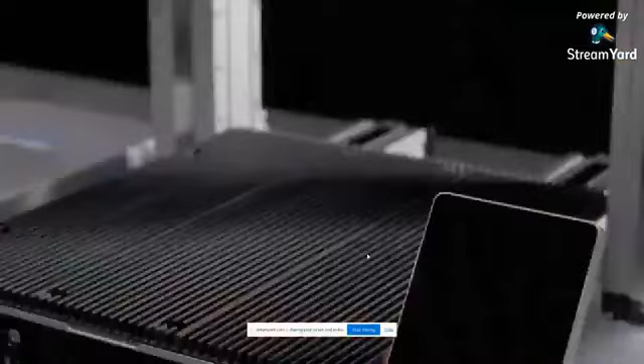When the first Snapmaker was introduced, it raised over $2 million and connected over 10,000 users in an active community. With the new Snapmaker, we're bringing the next generation of advanced technology to this iconic design. The new Snapmaker is faster, smarter, larger, and more powerful than ever before. From 3D printing to laser engraving and cutting and CNC carving, it supports a wide variety of materials for limitless creativity.

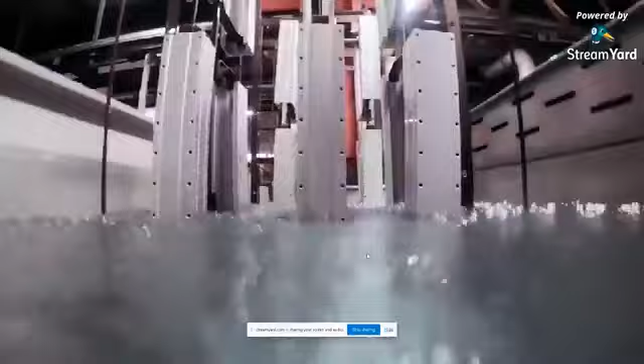The components are made from high-strength metal. Anodizing converts the surface of the metal into a durable anodic oxide finish. Each process is strictly controlled, and due to the higher level of automation, both the quality and the speed of production have been significantly increased. Every part is meticulously made.

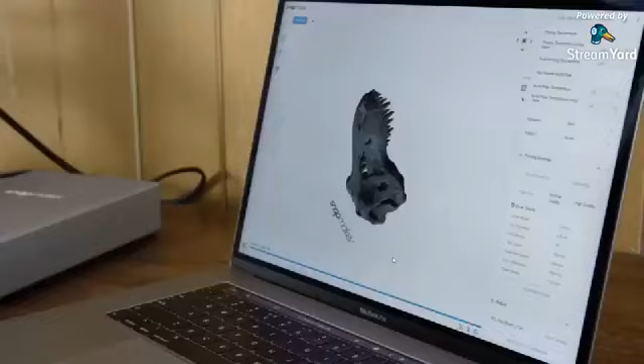In creating the new Snapmaker, we've taken the all-metal design to the next level. The new Snapmaker is modular, and it only takes a few steps to set up. Our software has greatly simplified the process of 3D printing, laser engraving, and CNC carving. You can also connect and control your Snapmaker via Wi-Fi or with the smart touchscreen.

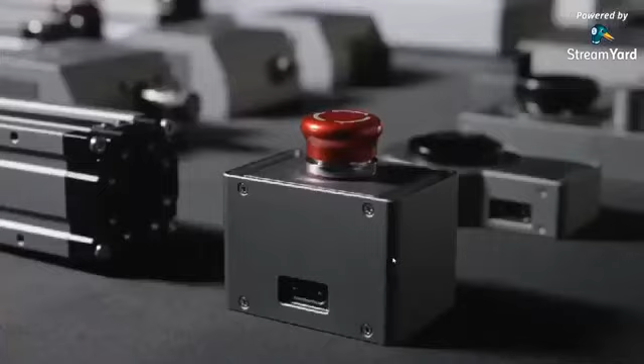Snapmaker is more than just a series of machines. It's a system of powerful modules and add-ons for creative people like you. You can make an extra-large CNC router, a huge laser engraver, and even a 4-axis CNC machine. You can further enhance it by adding an IP camera, a hand wheel, an emergency stop button, an enclosure, and more. The new Snapmaker includes an automatic bed leveling feature that ensures you print on a level bed every time.

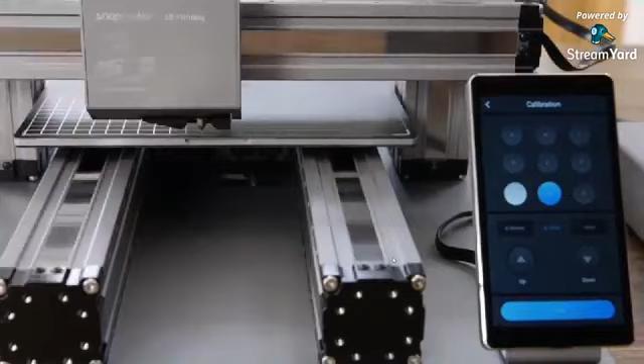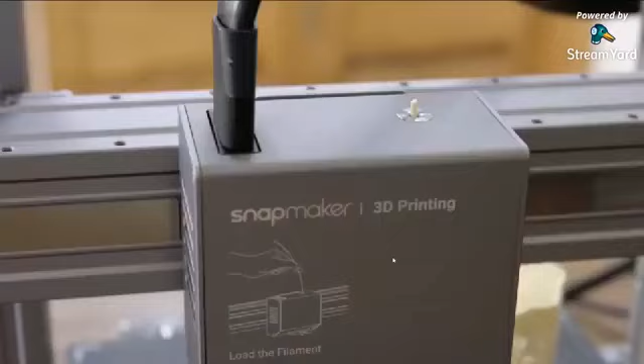The cooling system is redesigned to cool the print in the most efficient way possible. If the filament runs out, Snapmaker will pause and notify you to load new filament. It can also detect power loss and resumes exactly where it left off, so you can recover any project. To remove a print, simply lift the build plate and flex it.

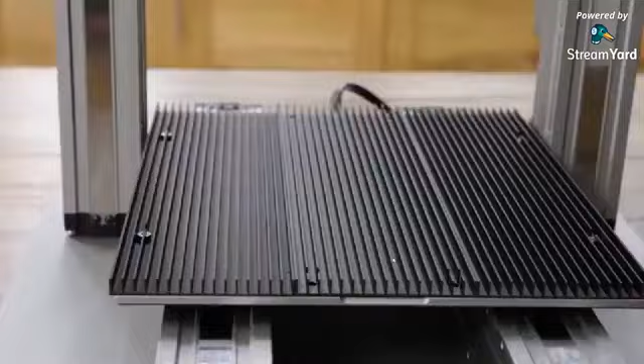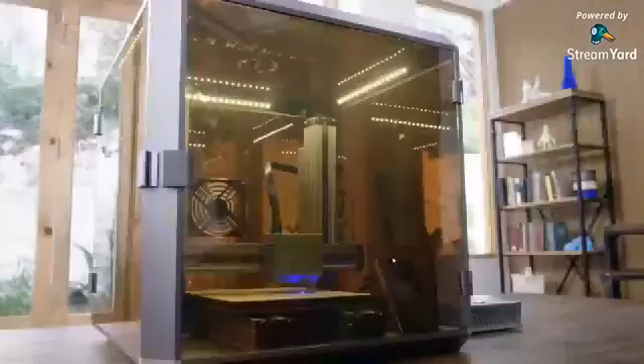For laser cutting, it uses a specially designed aluminum grid table. Its built-in camera allows you to preview a design on any material or surface. What you see is what you get. It makes laser cutting as easy as drawing with a pen. It can convert your drawing into a vector image that can be edited directly in the software for laser engraving and cutting.

It is 5 times faster than the original model. Whenever a new idea strikes, you'll be ready to turn it into reality.

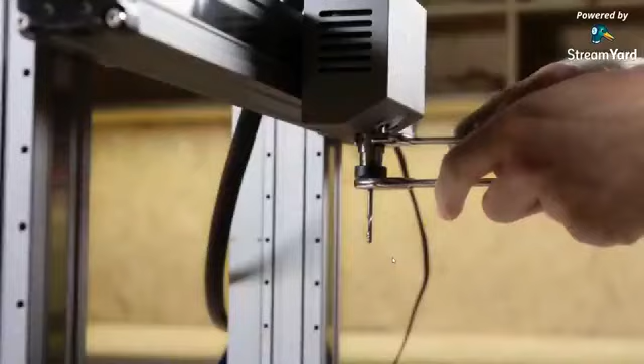For CNC carving, it now features a fully upgraded CNC module and wasteboard. It supports over 100 carving and cutting bits by using the standard ER11 collet. Upgraded clamps provide a tighter hold. It has faster working speed, a larger step down, and fully enclosed linear modules.

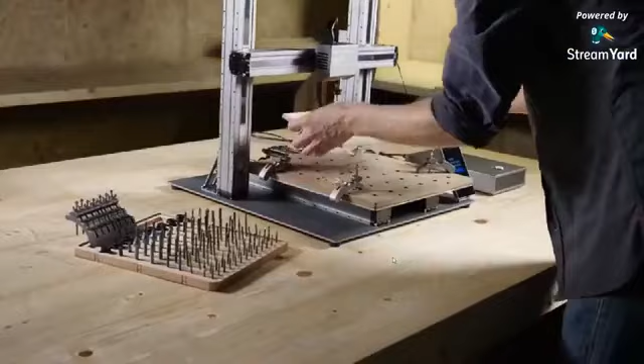Bring your ideas to life and unlock your full creative potential with the new Snapmaker. It is the most advanced 3-in-1 3D printer we've ever created.

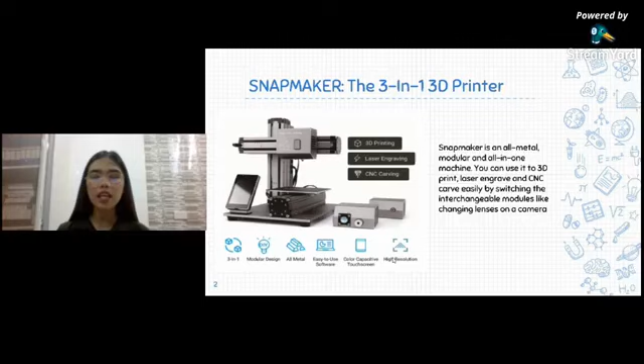Snapmaker, the 3-in-1 3D printer, is an all-metal modular and all-in-one machine. You can use it to 3D print, laser engrave, and CNC carve easily by switching the interchangeable modules, like changing lenses on your camera. The three interchangeable function modules are the 3D printing module, the laser engraving module, and the CNC or computer numerical control carving module.

Now for the 3D printing module, it is an additive manufacturing process that creates a three-dimensional object by incrementally adding materials until the object is complete.

There are several types of 3D printing technologies in use today, and FDM, or fused deposition modeling, sometimes called fused filament fabrication or FFF, is the most popular one. FDM is a type of additive manufacturing technology that enables the construction of three-dimensional objects, prototypes, and products through a computer-aided manufacturing process. It is used in 3D printing or the design of solid models and prototypes in a layered or additive approach.

For the laser engraving module, in 3D printing it is an additive process. Laser engraving and CNC are types of subtractive manufacturing methods. The laser engraving module uses a laser beam to create a detailed design on the surface of an object. The CNC, or computer numerical control carving module, is a subtractive manufacturing technology where parts are created by removing materials from a solid material using a variety of carving or cutting tools. This is a fundamentally different way of manufacturing compared to additive, which is 3D printing technology.

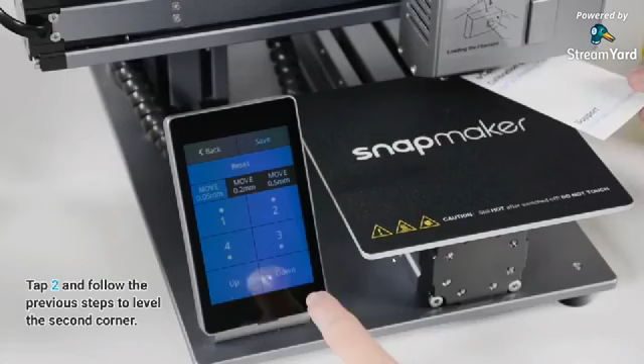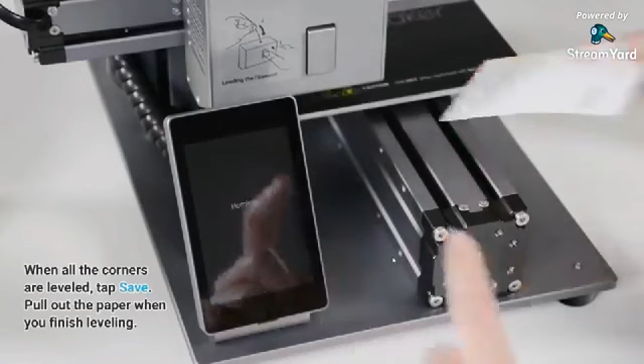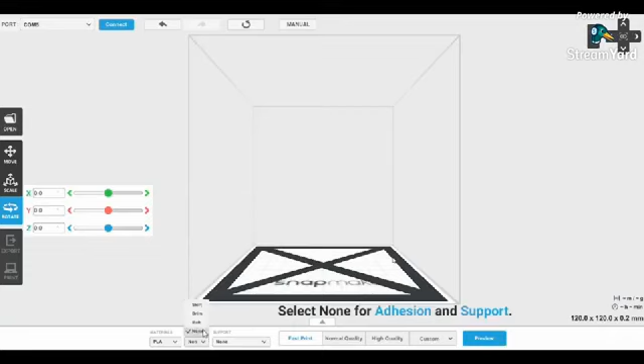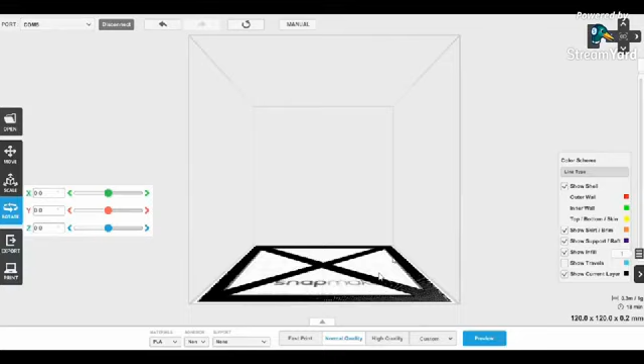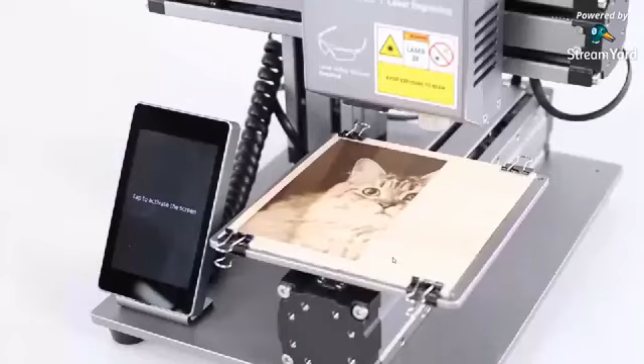In this video, we're going to demonstrate the use of the Snapmaker Original Laser function by engraving a grayscale image. It will cover the whole process of laser engraver usage, including generating G-code, fixing the material, determining the engraving area, transferring G-code to the machine, and starting engraving.

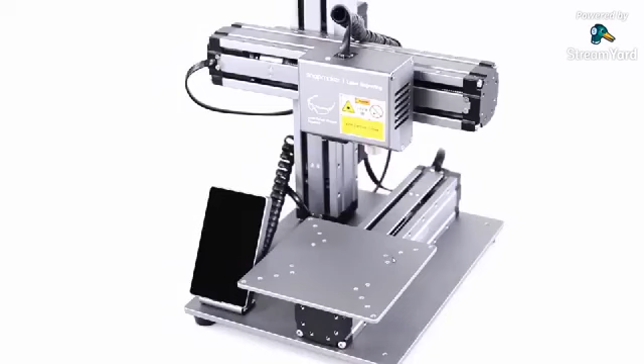First, you need to download the software from our website and install it. Then make sure both the laser module and the engraving platform are properly assembled, and all the cables are correctly connected. Please prepare the items and tools as illustrated. Every time before you turn on the laser, make sure you and any viewers have put on your laser safety goggles.

Open the software, and select your machine model first. Next, enter the Laser G-code generator. You can upload multiple files from different modes and engrave them in just one G-code. In this case, we select grayscale mode to upload a grayscale image as an example.

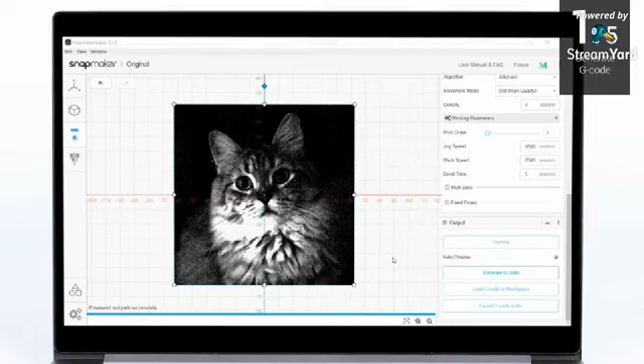Left-click to select an image. Right-click to see the operation menu. You can configure the settings for the image as needed. Auto preview is enabled by default, and the software will automatically generate the image preview based on the current parameters. If auto preview is disabled, you need to manually click preview. After you have set the laser power and finished configuring the other parameters as needed, click Generate G-code.

You can use a pencil to mark the midpoint of the material, which is applicable to setting the work origin later. Place the material, then fix it to the engraving platform. Make sure the clips will not collide with any parts of the machine.

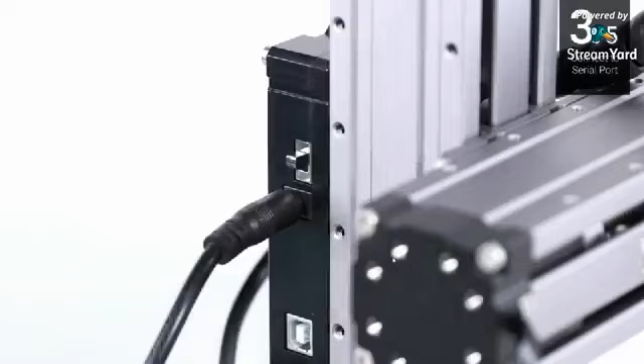Turn on the machine. Connect your computer to the machine using the provided USB cable. Then enter Workspace and refresh the serial port list in the Connection section. Click the drop-down button and select the serial port of the machine, then click Open.

Enter the Laser G-code generator, then click Load G-code to Workspace. Before you turn on the laser, make sure you and any viewers have put on your laser safety goggles. Now set a small value, such as 5%, for laser power, then turn on the laser.

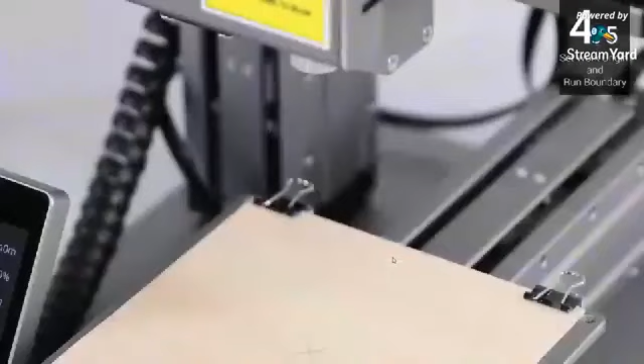Find out where the engraving will be by setting the work origin. The work origin corresponds to the 0,0 coordinate origin in the software. In this case, the center of the grayscale image corresponds to the coordinate origin in the software, so we move the laser spot over the center of the material.

Place the calibration card under the laser spot. Keep adjusting the height of the laser module until the laser spot is smaller than the black dot on the calibration card.

Click Set Work Origin. Click Run Boundary to check if the work origin is proper. If not, reset the work origin and run boundary again.

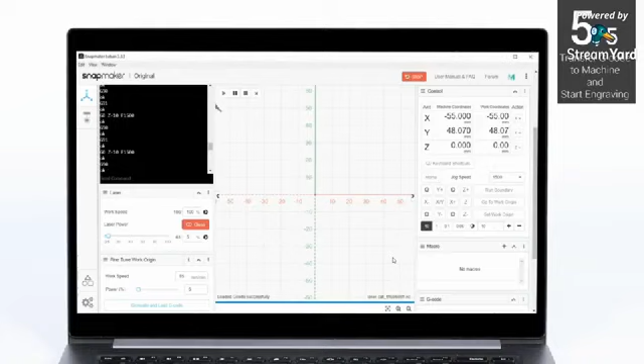Now you can use the USB cable or the USB flash drive to transfer the G-code to the machine and start engraving. If you prefer online engraving, just click the Run button in the software. In this way, the computer must be connected to the machine throughout the process. You can adjust work speed and laser power during the engraving process.

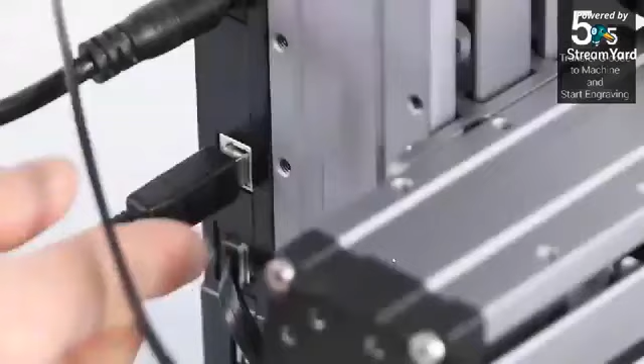If you prefer offline engraving, please disconnect the serial port and unplug the USB cable. Enter Laser G-code generator, then click Export G-code to file. The extension of the exported G-code file is .nc by default.

Save it to the USB flash drive. Insert the USB flash drive into the controller of the machine. Tap Files on the touchscreen. Select the G-code file and tap Start to start engraving.

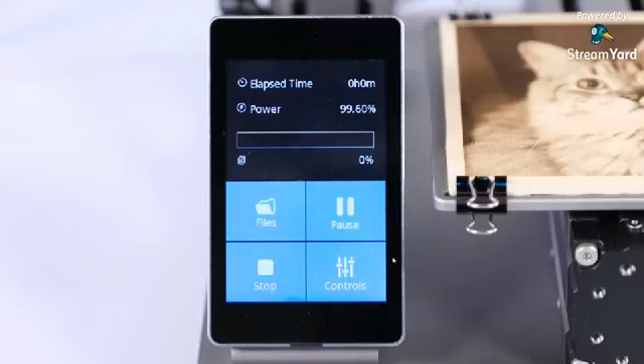When you're done, tap Controls, then Jog Mode on the touchscreen. Move the laser module and the engraving platform to a proper position. Then remove the clips and the finished work.

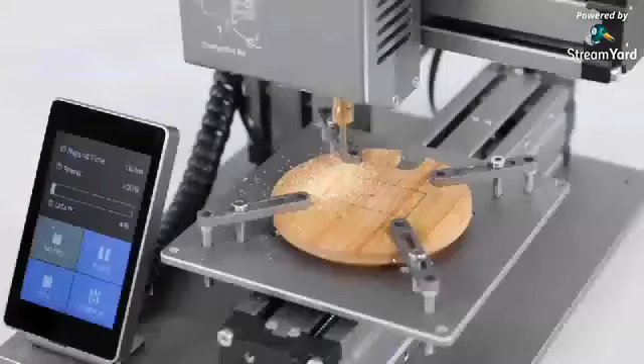In this video, we're going to demonstrate the use of the Snapmaker Original CNC function by carving a personalized lid. It will cover the whole process of CNC carver usage, including generating G-code, fixing material,

attaching the CNC bit, determining the carving area, transferring G-code to the machine, and starting carving.

First, you need to download the software from our website and install it. Then make sure both the CNC module and the carving platform are properly assembled, and all the cables are correctly connected. Please prepare the items and tools as illustrated.

Open the software, and you need to select your machine model first. Next, enter CNC G-code generator.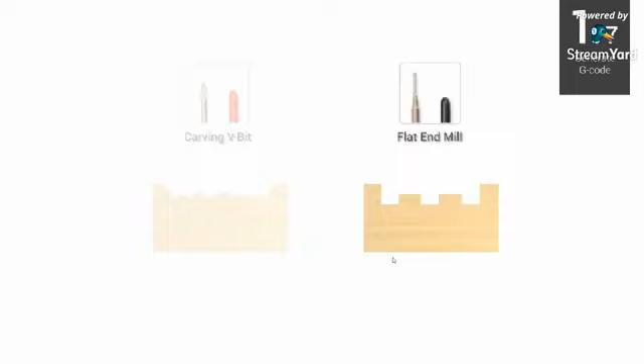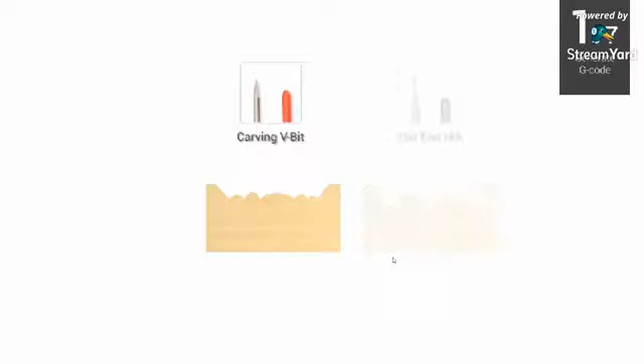Flat end mills are typically used for slotting or cutting materials into a flat surface. Carving V-bits are great for carving detailed designs, especially in relief and curved materials. In this case, we will use an image for carving, and we select the carving V-bit.

Select relief mode to upload the image. You can upload multiple files from different modes and carve them in just one G-code.

When setting the size of the carved image, make sure it is smaller than the sizes of both the material and the carving platform. Based on the measured material thickness, set the target depth as needed. And based on the material properties, set the step down as needed.

Auto preview is enabled by default. The software will automatically generate the image preview based on the current parameters. If auto preview is disabled, you need to manually click Preview. After you have finished configuring the other parameters as needed, click Generate G-code.

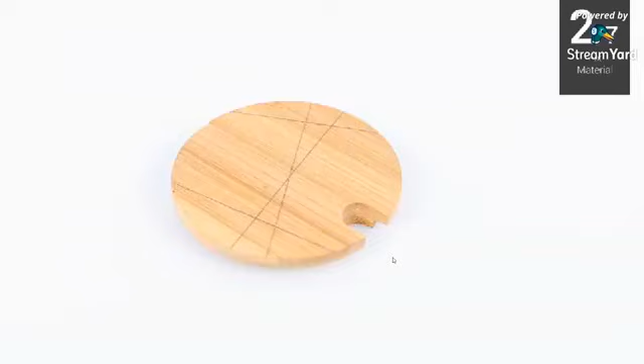You can use a pencil to mark the midpoint of the material, which is applicable to setting the work origin later. Also, according to the size previously set in the G-code, you can mark the estimated carving area of the material.

Place the material, then attach the fixtures outside the marked carving area. Make sure the fixtures will not collide with any parts of the machine.

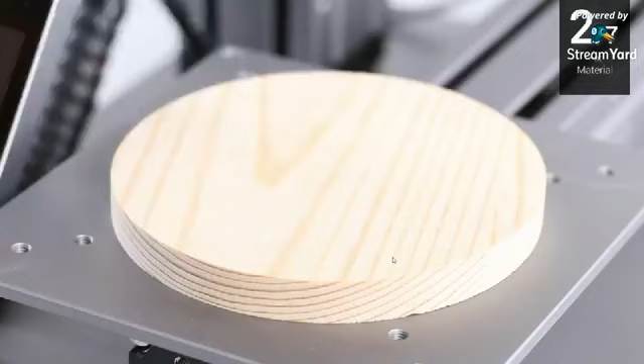If you need to cut through the material, a spoil board must be put under the material to avoid damaging the CNC bit and the carving platform.

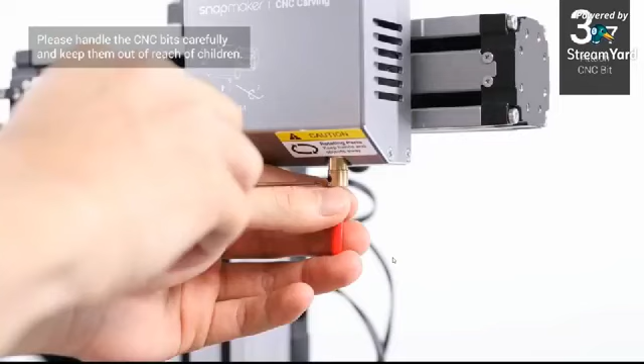Use the provided 1.5mm hex key wrench to loosen the screw on the shank of the CNC module. Insert the CNC bit onto the shank, then use the wrench to completely tighten the screw. Remove the CNC bit guard.

Now turn on the machine. Before you turn on the CNC module, make sure you and any viewers have put on your CNC safety goggles.

Select Controls on the touchscreen. Turn on the CNC module to make sure the spindle works properly. Then turn off the CNC module.

Connect your computer to the machine using the provided USB cable. Then enter Workspace in the software. Refresh the serial port list in the connection section. Click the drop-down button and select the serial port of the machine. Then click Open.

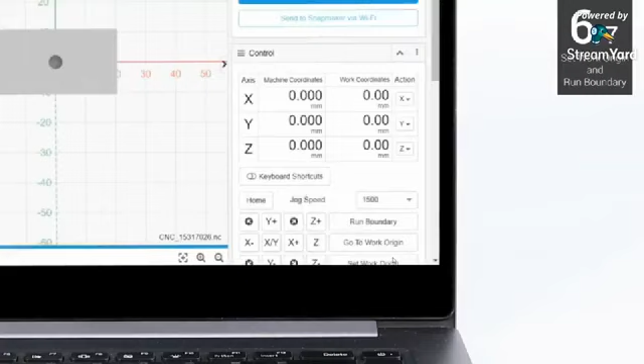Enter CNC G-code generator, then click Load G-code to Workspace. Find out where the carving will be by setting the work origin.

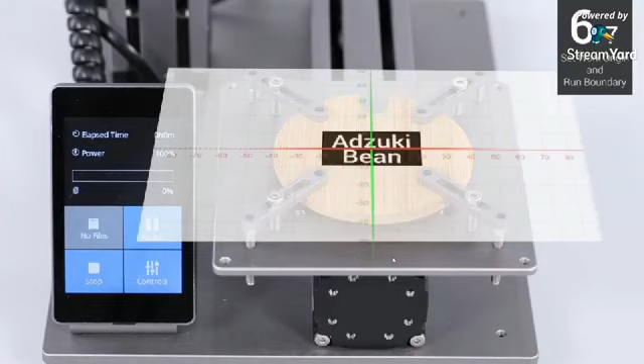The work origin corresponds to the 0,0 coordinate origin in the software. In this case, the center of the image corresponds to the coordinate origin in the software, so we move the CNC bit above the center of the material.

Adjust the distance between the CNC bit and the material to about 5 mm. Then, place the calibration card or a piece of A4 paper between the CNC bit and the material. Keep adjusting the height of the CNC bit until there is slight resistance when you pull out the calibration card. It should be wrinkled when you push it forward.

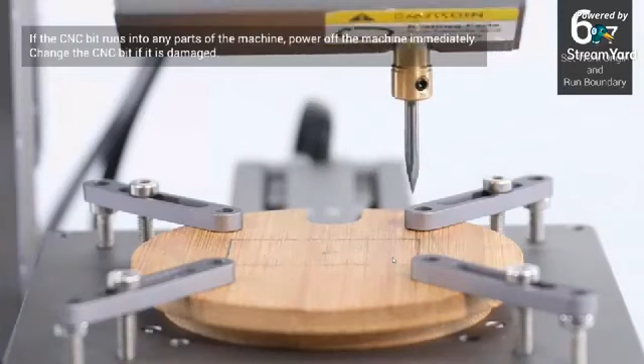Click Set Work Origin. Lift the CNC bit above the fixtures, then click Run Boundary to check if the work origin is proper. If not, reset the work origin and run boundary again. You can lower the CNC bit to run boundary again at different heights.

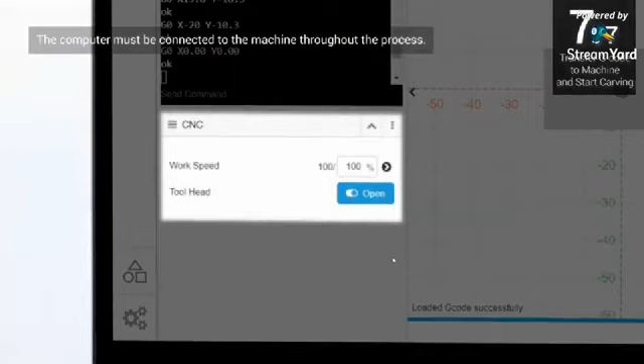Now, you can use the USB cable or the USB flash drive to transfer the G-code to the machine and start carving. If you prefer online carving, you just need to click the Run button in the software. You can adjust work speed during the carving process.

If you prefer offline carving, please disconnect the serial port and unplug the USB cable. Enter the CNC G-code generator, then click Export G-code to file. The extension of the exported G-code file is .cnc.

Save it to the USB flash drive. Insert the USB flash drive into the controller of the machine. Tap Files on the touchscreen. Select the G-code file and tap Start to start carving.

When the carving process completes, tap Controls, then Jog Mode on the touchscreen. Move the CNC module and the carving platform to a proper position.

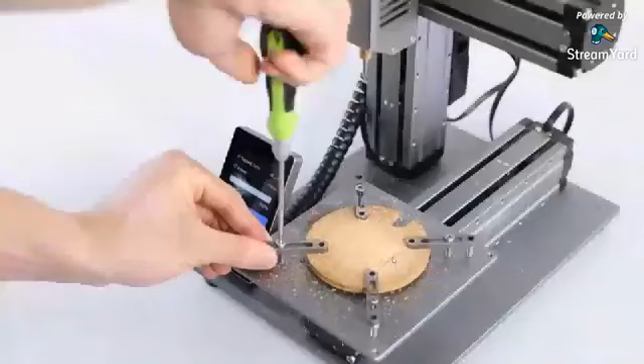Remove the fixtures and clean the dust. Then you can remove the finished work. Thank you for watching.

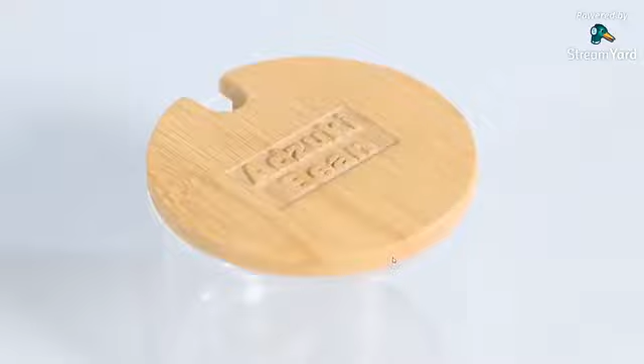For 3D printing, the first step is to prepare your files for printing. First, you need to design a 3D model using Tinkercad or SketchUp.

With 3D scan, you can get a 3D model of a physical object with a 3D scanner. You can also find various free and high-quality 3D models online, for example on thingiverse.com or MyMiniFactory, to set the G-code file.

First is to edit, set the printing settings for your design. Second, generate G-codes: turn your design into a G-code file that instructs the machine on what action to perform. Then third, transfer the G-code file to Snapmaker.

You can transfer the G-code files to the machine either using a computer to load G-code to the workspace, or a USB flash drive to export G-code to file.

Then after that, start printing. Select the G-code file on the touchscreen, then tap to start printing.

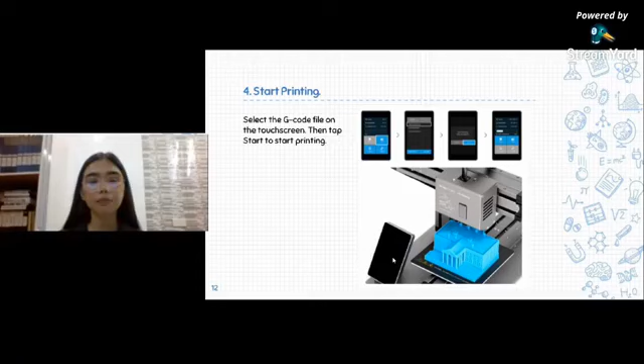Same as with laser engraving, there are steps that you need to follow to enable you to engrave an object. First, prepare files for engraving: design, take a photo, and download.

Generate G-codes. Transfer G-code files to Snapmaker. Same as with 3D printing.

You may either use a computer to load G-code to the workspace, or a USB flash drive to export G-code to file. Number 4 is to start engraving: select the G-code file on the touchscreen, then tap to start engraving.

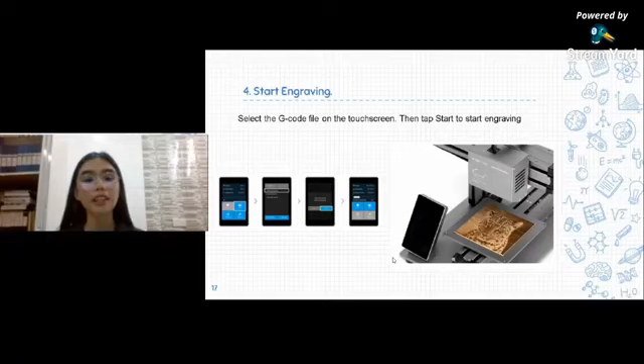Also the same with CNC carving: first, you need to prepare the files for carving, design, and download. Number 2, generate the G-code file: edit or set carving or cutting for your design, generate G-code files, then transfer the G-code files to Snapmaker, again either using a computer or a USB flash drive.

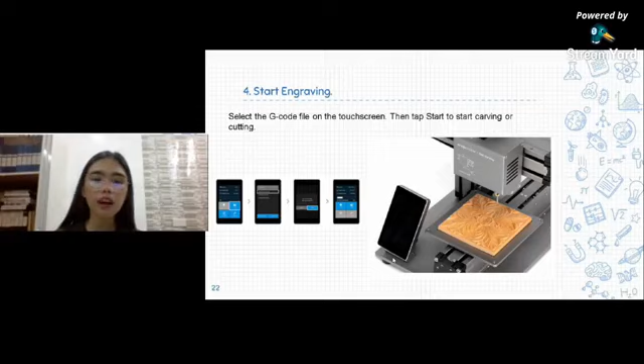Then after that, you may start engraving. Select the G-code file on the touchscreen, then tap the screen to start carving or cutting.

It is easy to use with the provided 3-in-1 software. Your stunning creation is just a few clicks away. This embedded software is the area wherein we can manage the chosen design to resize, and adjust texture and smoothness quality before printing.

It is built for thinkers or tinkerers. Transforming it into a different machine is as easy as building Legos, and free to DIY. Making accessories for Snapmaker is part of the fun.

Now, why do we use Snapmaker in your classroom? 3D printing, laser engraving, and CNC carving are used to turn your ideas into reality in a variety of industries, including product prototyping, engineering, architecture, design and arts, entertainment, etc.

We believe that the Snapmaker 3-in-1 3D printer can bring a new version of things-making to your students. From teacher-led projects to independent projects in a making classroom, it can help them gain practical, hands-on experience and learn to be collaborative.

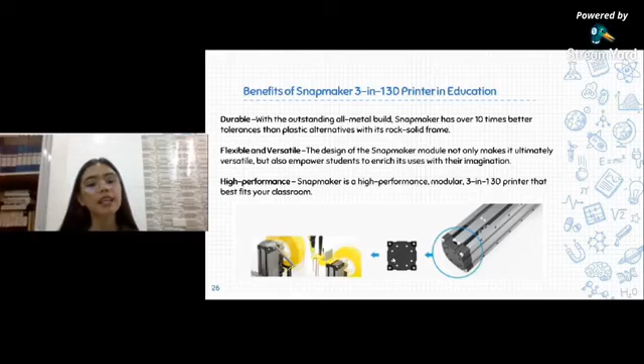A complete learning ecosystem. With the interchangeable modules, you can easily do 3D printing, laser engraving, and CNC carving. You can turn your desktop into a workshop with the modular Snapmaker 3D printer kit.

Second, you can enjoy more features simply by adding specific add-ons. Available add-ons include the laser cutting module, the Z-axis extension module, and enclosure.

Third, a variety of materials are available for processing. You can easily prepare your lessons using our tested materials, which are provided in our online stores. Next, you can easily find commonly used accessories in our online stores, such as CNC bits, extruder hot end kit replacements, and heated bed sticker replacements.

For an active community, you can always find inspiration through our global online community made up of all types of makers, from whom you can get helpful tips as well as design files easily.

For online manuals, you can access the latest manuals anytime and anywhere. Quick start guides: each Snapmaker 3-in-1 3D printer package includes a complete set of quick start guidebooks. For video tutorials, we have made comprehensive video tutorials for you, which include getting started series, software feature series, troubleshooting series, and tips and tricks.

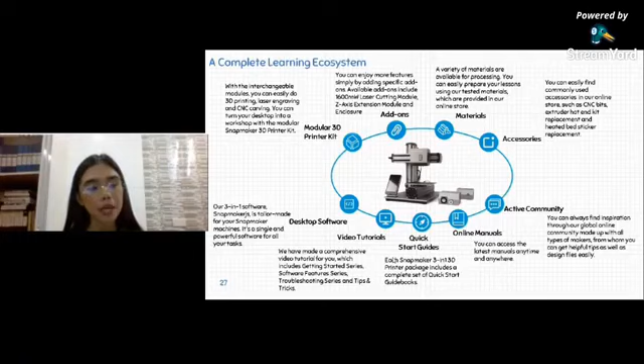And last but not least is the desktop software, where our 3-in-1 software Snapmakerjs is tailored made for your Snapmaker machine. It's a single and powerful software for all your tasks.

It is no secret that Snapmaker users are some of the most creative people on earth. They have utilized their machines for a variety of good causes, and once you join them, you'll hear interesting and inspirational DIY stories from the Snapmaker community.

That's all I got for you for Snapmaker for Education. On our next series, we'll be showcasing how to use the 3D printer, laser engraving tool, and the CNC carving.

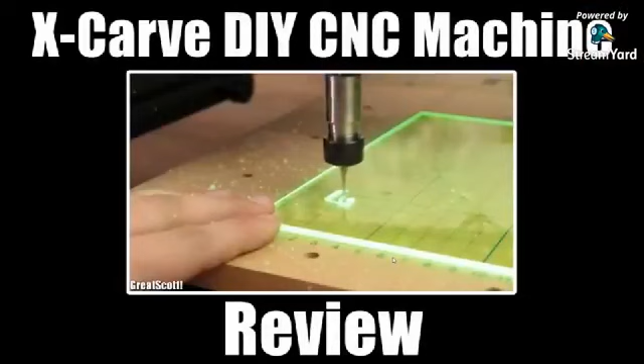But some longtime viewers of mine might also know that I used to own an X-Carve CNC machine. The problem with that machine was that it was super loud, and thus I could not use it in my apartment for very long, so I gave it away at some point. But nevertheless, it is safe to say that owning a CNC machine grants you access to a whole new territory of projects that you can create.

That is why I was rather excited when the company Snapmaker reached out to me and asked whether I wanted to test out their new 3-in-1 machine, the Snapmaker 2.0, which is a 3D printer, laser engraver/cutter, and CNC machine all in one.

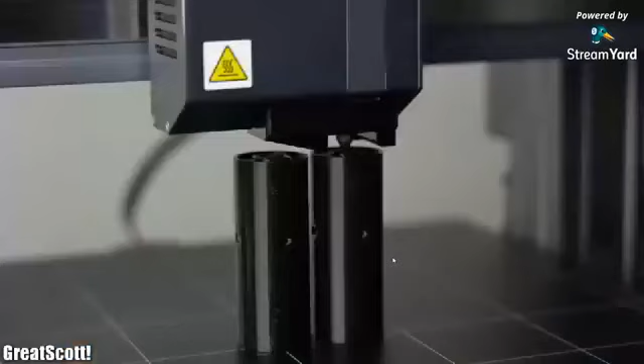So in this video, I will show you how easy it is to assemble, I will tell you how useful I think each function is, and finally I will give you my verdict on whether I think it is worth its original €1,800 price tag, and whether it is a quieter replacement for my old CNC machine. For full disclosure, this machine was sent to me free of charge, but that doesn't mean I will go easy on it. So let's get started.

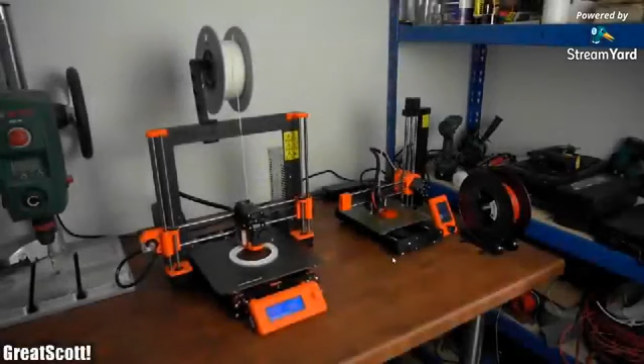First off, in order to get some space for the new machine, I cleared out one compartment of my heavy-duty shelf to position my Prusa 3D printers inside there. They did fit perfectly, except for the spool holder of my Mark III, but we can 3D print a replacement for it I found on Thingiverse later on.

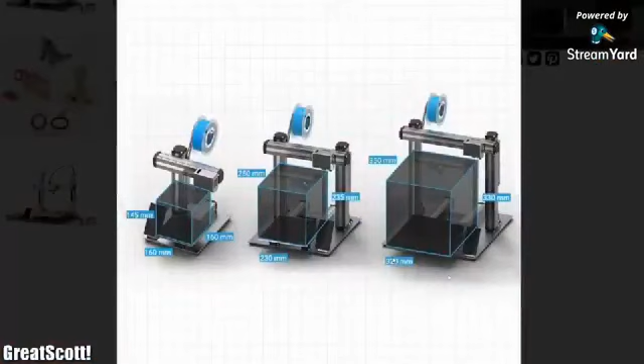Before that though, it was time to bring in the big package of the Snapmaker 2.0 A350, which is the version with the biggest build platform. After opening it up, I was greeted with the manual, which in hindsight was very well written, detailed and easy to follow. Moving on, underneath the manual I found not only cardboard boxes with 5 linear rails, but also boxes with all kinds of parts, components and tools required for the machine. I have to say that they did a pretty awesome job on the packaging side of things.

To start the assembly, I firstly opened up the tool and accessory box, which comes with pretty much everything you could ever need to assemble and use this machine. But for now, I simply got the screwdriver ready and started screwing the feet to the base plates.

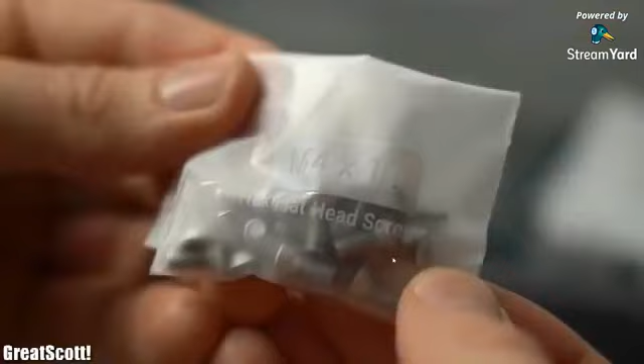As a side note, all bags with parts were labeled very nicely, so finding the right ones was always a breeze. Next I unpacked 2 linear rails, which I secured to the base plates. Then I got the metal brackets and attached them to the base plate as well.

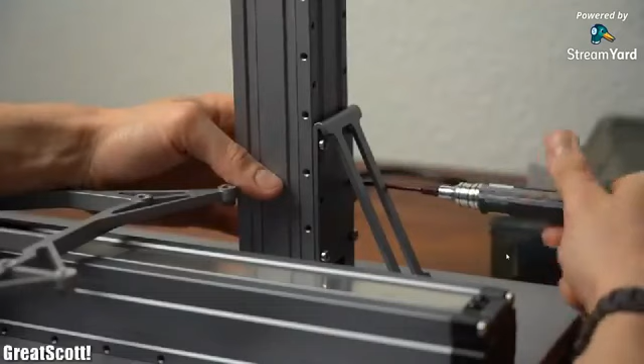After also adding the touchscreen holder, it was time to mount the Z-axis linear rails to the metal brackets. The last linear rail for the tool heads was then secured to the Z-axis rails. And just like that, the main structure was complete.

So I moved on by adding the Y and Z-axis adapters and cables to the system, which I then plugged into the main controller that I secured beforehand to one Z-axis. After also hooking up the touchscreen, it was time to unpack the power module, which I also promptly hooked up to the main controller.

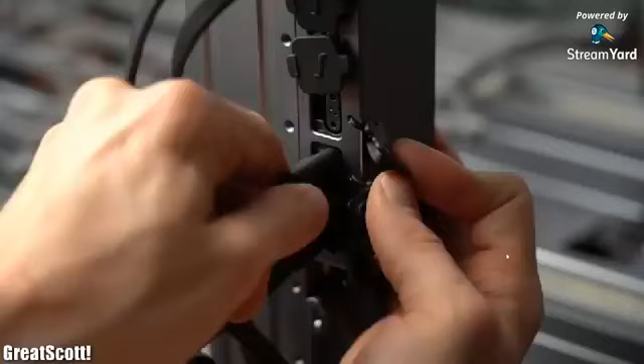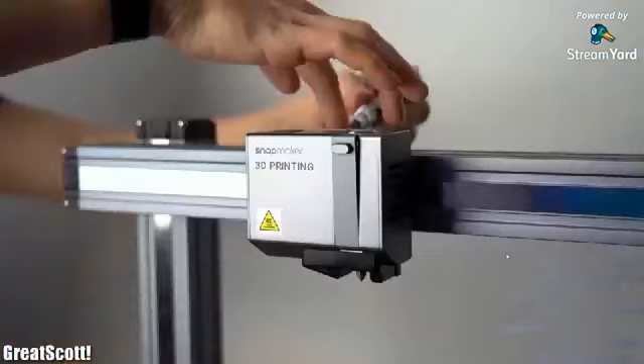After only 1 hour into the assembly, I was already at the point to choose one toolhead, and I started with the 3D printing one. So I screwed it to the linear rail and plugged a wire into it, which I then connected to the controller. After also adding the spool holder to the frame, I stumbled upon the most annoying part.

Using 22 screws to attach the heated bed to the machine. The small problem I have with this is that when you want to change to laser cutting or the CNC function, you will always have to remove those screws, put on another work surface, and tighten the screws again.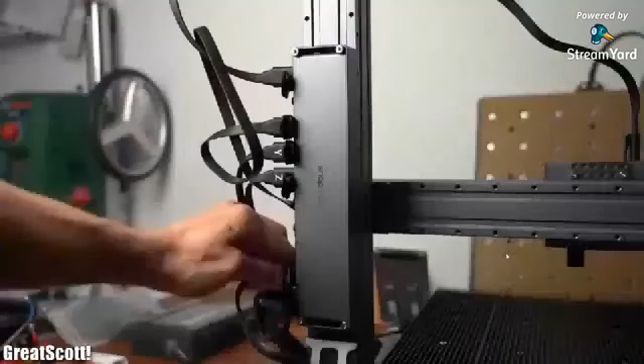While I think Snapmaker did an awesome job with the cable system and the main controller when it comes to being a modular system, I would have appreciated another solution than using tons of screws. But nevertheless, by using an electric drill, you can get this done fairly quickly.

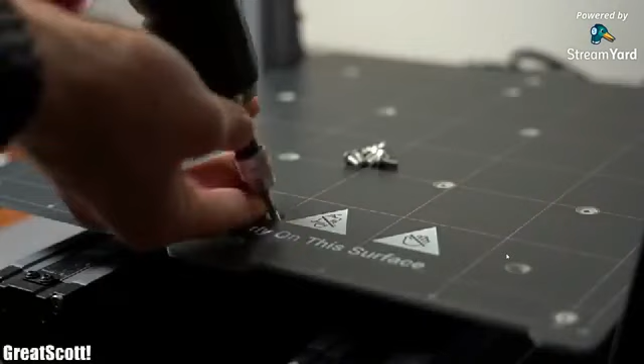After placing the removable beds onto the heated beds, it was finally time to flip the main power switch and do the initial Wi-Fi setup.

As soon as that was done, I performed the usual 3D printer Z-offset calibration and inserted the included black PLA filaments into the printheads. Now it was finally time to download, install and start the Snapmaker software.

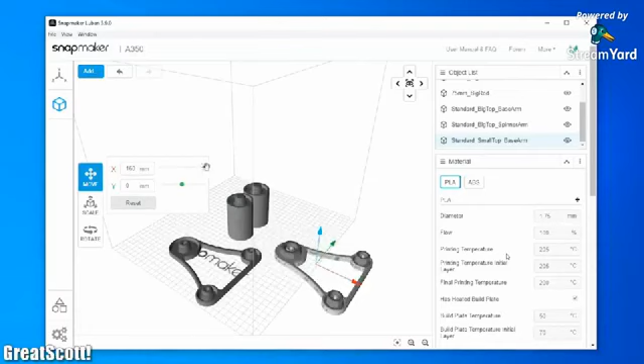What I can say about it after testing the machine for around 30 hours is that it does work without any problems, but it is definitely not polished when it comes to user convenience.

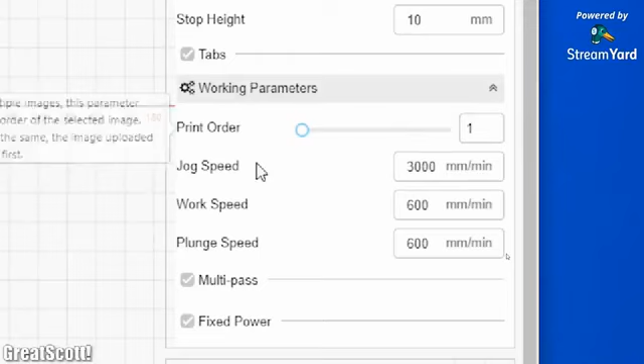For example, the Prusa Slicer software gives you lots of pre-made settings that you can easily use, while with the Snapmaker software, you will have to enter the printing and filament settings all on your own. This is also the case for the laser engraving, cutting, and CNC machining.

Moving on though, after placing the first 3D model for my new spool holder inside the software, I sliced it and simply sent it over to the machine through Wi-Fi, which was pretty handy. And just like that, the machine started printing without any problems, and did its job pretty well.

Now I 3D printed 4 more parts with this machine, while I used my Prusa Mini for 2 other parts, so that I could quickly add a filament guide as well as a spool holder to my Mark III to make it functional again. And that means it was time for a comparison print with the well-known Benchy model.

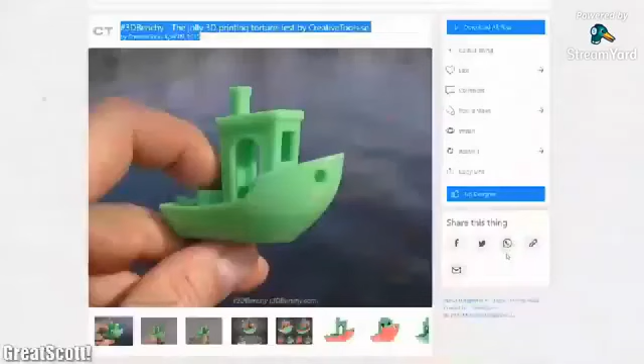For that, I tried to use pretty much the same print speed settings for all 3 machines. And after around 1.5 hours of printing, the results were in.

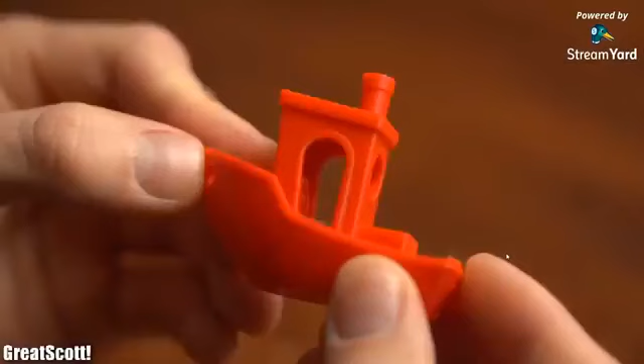I have to say that the Prusa Mini one is pretty flawless, followed by the Mark III one with minor imperfections, and last but not least we got the Snapmaker one, which is still good, but there were some noticeable imperfections. There's also another problem with the Snapmaker machine, which you might be able to hear when turning it on.

No idea why, but the power supply fan is always at 100%. And during the 3D printing, the machine becomes even louder due to the moving of the linear rails.

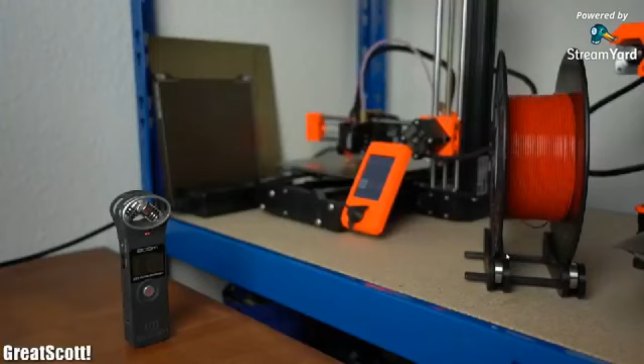In comparison, this is how the Prusa Mini sounds, and this is how the Mark III sounds.

So in my opinion, the Snapmaker is great as a 3D printer if you need large prints. But for everything small, I would highly recommend the Prusa Mini.